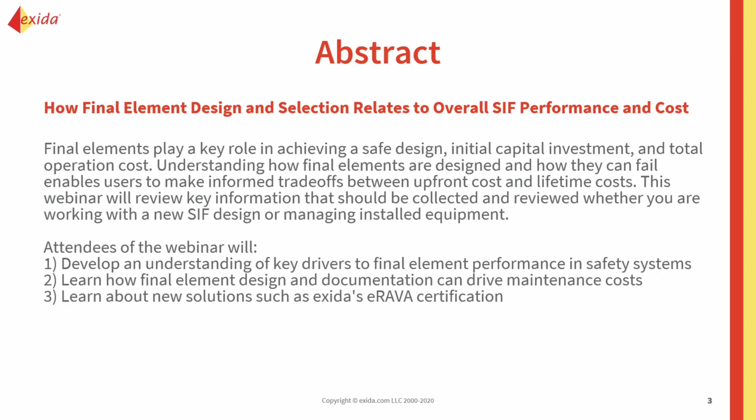We'll cover what the drivers are when selecting a final element, how that selection can affect maintenance costs, and learn about new solutions and ways to address that, such as exida's new eRAVA certification program.

exida is a customer-focused company. We really focus on three main areas: enterprise tools, certification and assessment, and lifecycle services. All of those are tightly related and reinforce each other, and we really try to bring a pragmatic approach to helping you solve your problems.

For many years, we've been playing defense when it comes to final elements and functional safety. A lot of our efforts, exida's efforts, and the industry's efforts have been on trying to avoid errors and mistakes being made that result in really unsafe systems being installed. And that's still very important, and there's still quite a bit of work to do in that area.

But we are making progress. The word's getting out. People are becoming more knowledgeable, and lots of companies, both equipment suppliers and plant owners, have made tremendous strides in that area.

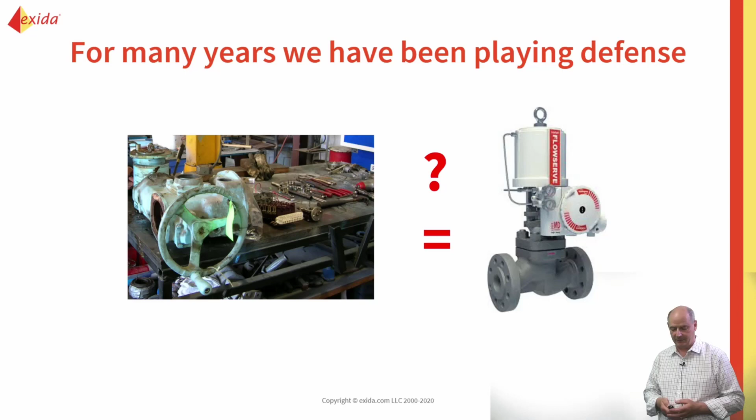The concept we'd like to introduce is the integrated process risk maturity model. So it's a classic maturity model based in 5 stages, going from really not a great deal of expertise over in the ostrich phase, moving all the way to a proactive or pretty sophisticated advanced solution.

And as you move from left to right, you're moving towards growing to the point where you're doing the right things, because all the way to the left, if you're not aware of the standards or kind of just viewing them as a tax, you might not even be doing activities you need to do. And as you move towards the center where you're becoming competent, maybe milestone 2 or milestone 3, where you're becoming capable and being able to do it in a repeatable manner, all the way to the right side where you're in kind of an advanced state and being proactive.

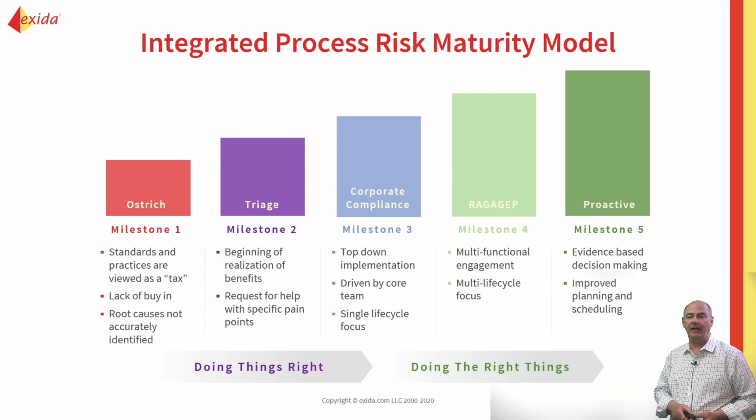You're collecting data, you're making evidence-based decisions. You've kind of moved from doing things right to doing the right things.

So that's just a general classic maturity model, and we've taken it and applied it to functional safety, alarm management, and cybersecurity. So if we really look at all 3 of those things, we can ask, how do all those things work together to increase plant safety?

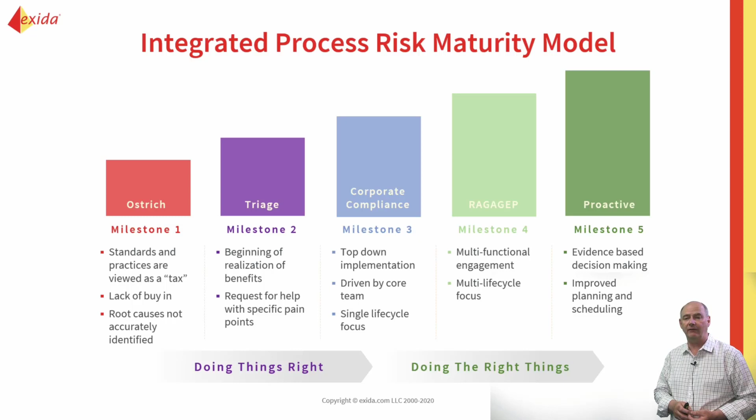I started with that photo. So a lot of work, as I said, has been done in that defensive stage, helping customers who weren't aware that there were problems or drivers, or have a problem and need somebody to help them triage it. So a lot of work's been done there.

We've done a lot of webinars on those types of subjects, and we want to start helping people move to becoming best practice and proactive in their approaches.

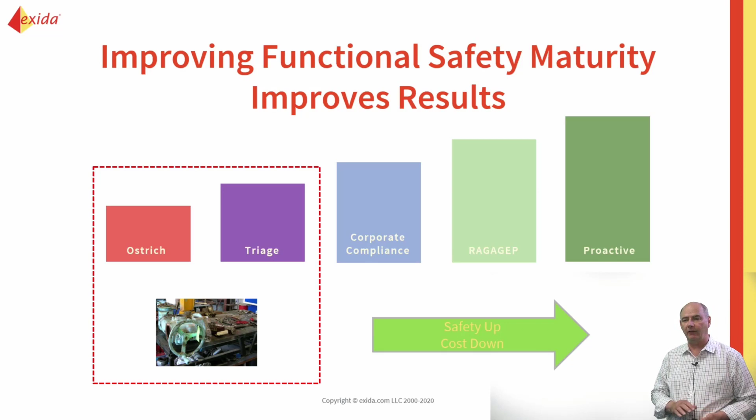So we want safety to go up and the cost of achieving it to go down. That's what we're going to focus a lot on today: what are the key levers that you can take advantage of to begin and continue your journey towards the right.

So failure avoidance is really what we could think of as classically systematic failures, things that can only be corrected by process or procedure. Some of those fall into design-related failures, and some fall into application-related failures. Design-related failures could be improper specification, either of the system or of the device being designed.

Application failures could be a failure that results from applying the wrong device or in the wrong application. So we're going to talk about methods to avoid and minimize those.

Failure reduction - there are ways to get better failure metrics from existing devices. Those are often the random failures or randomly occurring failures, and there are a few techniques that we've developed

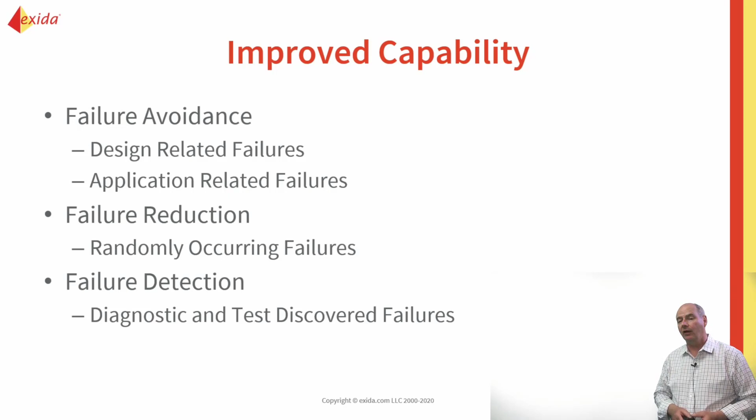that we're going to discuss about how you can get lower failure rates for devices in a justifiable and maintainable way. And then finally, failure detections - we know we're not going to get rid of all failures, so how are we going to detect them and correct them before they defeat the system?

If we look at currently what I would call a properly designed automation solution, I'd say that's right in the middle of the maturity model.

We give credit in the assessments and in our failure rates for well-designed, engineered industrial products that are properly applied. So if you're using, say, the standard failure rates that come with the device, you're using Exida, you're doing the normal stuff, you're getting results. Those results are indicative of what you would expect in your plant.

We've calibrated that with over 350 billion field hours worth of failure data. So we're really comfortable that that's kind of honed in and a good result.

We are not on the left-hand side, where we've got that really unpredictable or unrepeatable thing, but we really haven't gotten as far to the right as maybe we could. So today we want to talk about moving to the right.

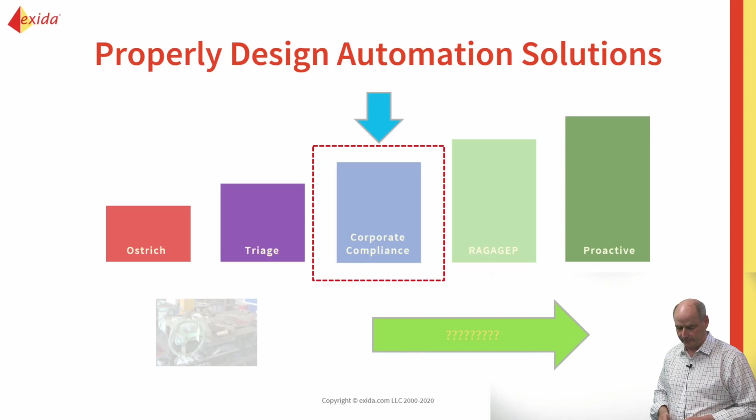Some key drivers that relate to maturity level, or how maturity level relates to them. If we're thinking about avoidance, it's going to be the failure rates of the product and the reliability of the product, but that really is going to relate to the selection of product. Over at maturity level 1, or ostrich, we might just be using generic failure rates.

If we move to the right, we're going to talk about new solutions that are in the eRAVA, or Exida remote actuated valve assembly, category. So we're going to move through a continuum where we're using generic to using certified components, to getting an integrated solution, to maybe getting a certified solution.

This concept of site safety index has a big impact on the failure rates you should select. And also there's an advanced analysis, a safety reliability analysis that can be done on products that may justify a further reduction. And then finally in the diagnostic and test realm, the testing that's being done really frankly could be

none. There are still people who have safety systems and don't have them on a periodic testing regime. And again, as we move from the left to the right, we could go from no testing, to typical testing, to following what's in the safety manual, and all the way to the right, we're going to be looking at optimized testing results.

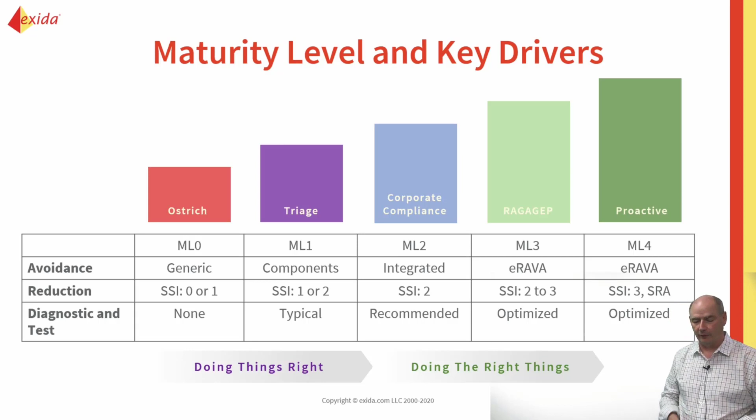So if we look at this maturity level 2, or right in the middle, for final elements, what does that look like? What should you be doing if you're taking failure rates out of an FMEDA report or out of Exida and using them? You should be using well-integrated and designed assemblies that have probably at this point a semi-formal

verification and validation technique. You should have typical plant capabilities when it comes to testing and maintenance, and you should make sure that your devices are implemented and tested per the requirements of their safety manuals.

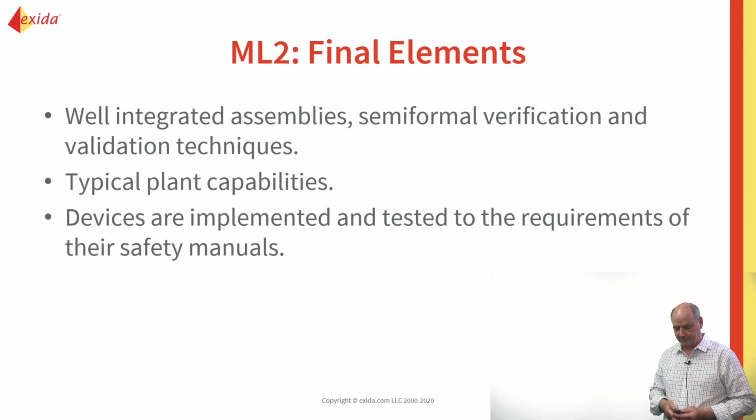So to move past what would be considered maturity level 2, what should you consider? You should consider using certified assemblies that have formal verification and validation techniques.

Look at process improvement in your plant that would move you from maybe a site safety index of 2 to maybe a site safety index of 3. And then make sure that the assembly you have has a safety manual for the assembly that's providing you kind of optimized testing information for that.

Proof testing information, that is.

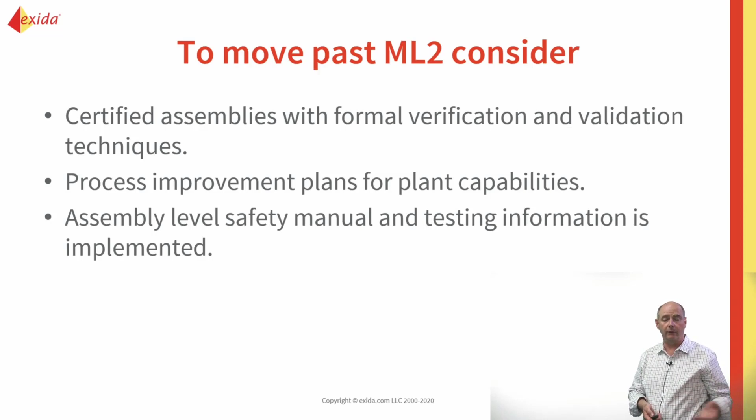So first thing I want to talk about is eRAVA. That stands for exida Remote Actuated Valve Assessment. That is a new program we've introduced in the last year, and it goes through a final assembly assessment, so the assessment of a complete final assembly. I'll talk a little bit about what we cover in that.

What that does is it basically reduces the variability and the risk associated with the assembly, and that provides you a more reliable solution. What's included in that is a comprehensive review and assessment of all the things in that.

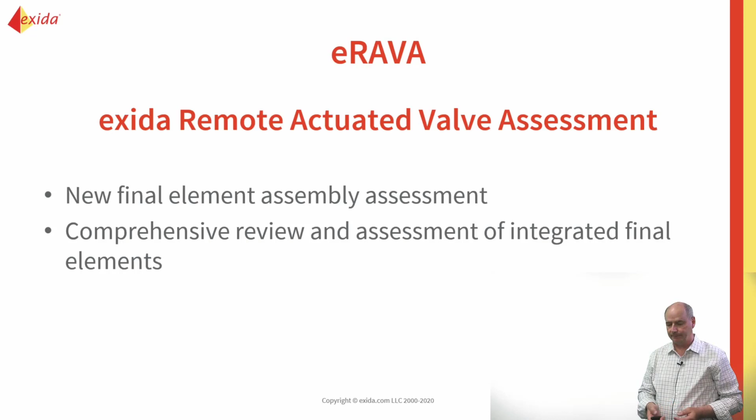So eRAVA has multiple things that we look at, and we look at multiple things in detail so we can provide a good assessment. So at the top level, we look at a deep dive of functional requirements of the assembly, application requirements of the assembly, detailed design specification.

Again, all of these are at the assembly level. Design verification, a fit for use evaluation, manufacturing capability, integration of the assembly, integration verification, then installation and operation and maintenance instructions.

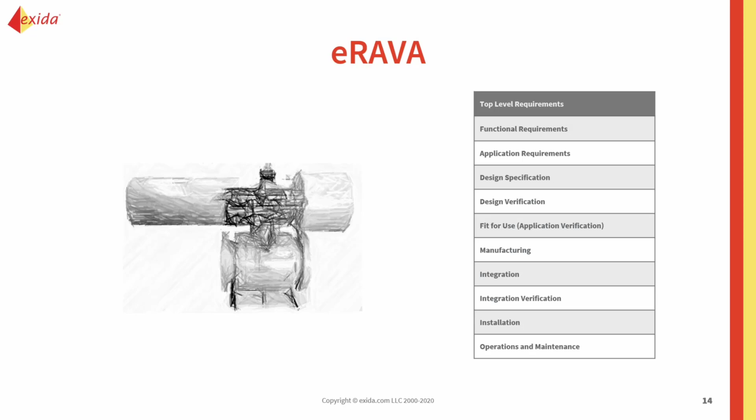If we expand that a little bit and just take a deep dive, let's take a deeper dive into design verification. So on the left-hand side, we've got our normal flow chart for an assessment project. And then with the eRAVA, we're going to go into that assembly.

And let's say we'll take, as I mentioned, design verification.

Under design verification, we're going to have multiple more detailed requirements we're going to look at, such as, is there a verification plan? Is the fail direction defined? Is it going to be a long standstill or only cycling once a year or so?

What are the fluid characteristics? What are the operating temperatures?

And then we could take torque, and this is just an example. All of these have greater detail, but for example, under design verification, we would have torque, and we would be looking at things like break to open torque. What's the break to open breakaway angle?

What's the run to open torque? End to open torque? Break to close torque? Run to close torque? And further. So for each of these subcategories, we're going to have a requirement that we're going to review and make sure is met.

And that the OEM has standards and practices to cover them, and then also publishes that information in a way such that the user can ensure that it's going to meet their requirements.

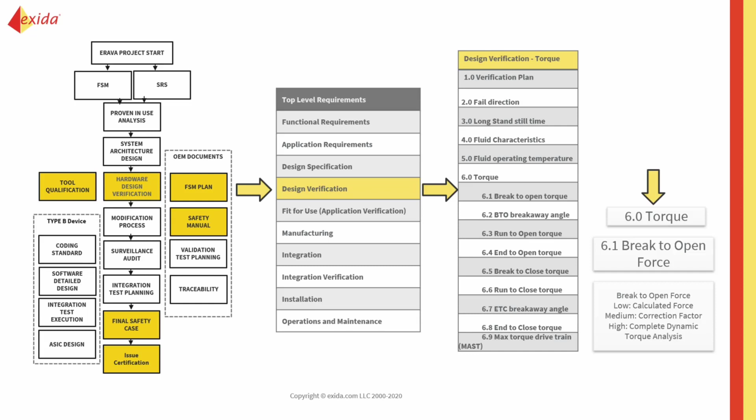In addition to the eRAVA, we also have a safety reliability analysis, and that's one where a detailed analysis of components can be done, which may justify lower failure rates as well if a specific component within a device is

designed to withstand the stresses or the application better, then it's going to have a lower failure rate.

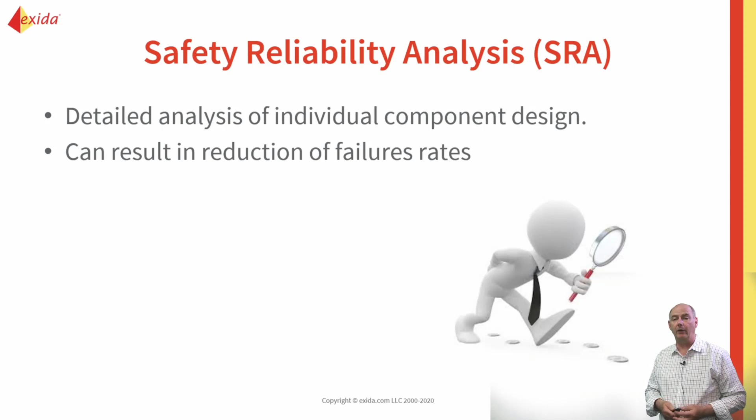If we look at safety culture or SSI, that's another big driver. We can realize that human factors play a big impact of safety performance. You have things such as imperfect repair, improper calibration, faulty installations.

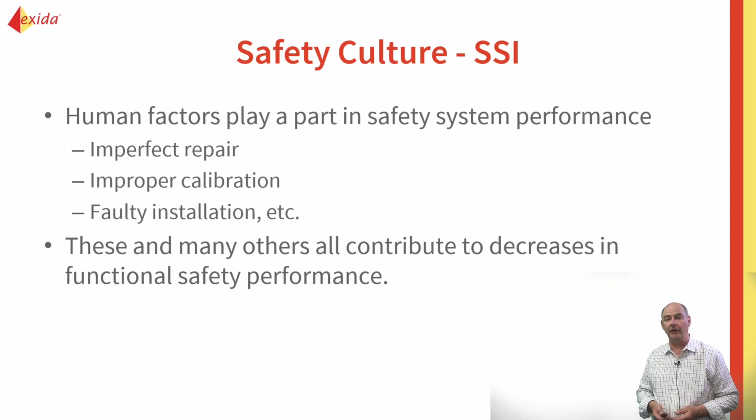These and other factors are going to decrease the overall safety performance, and Site Safety Index is a way to measure that. So Site Safety Index is something that exida has come up with, and we use it to adjust metrics.

So we could think of a typical plant as being Site Safety Index 2. If you improve, you might be Site Safety Index 3, and a perfect plant would be Site Safety Index 4.

But you could also be less than typical, and then you might be down at a Site Safety Index of 1 or 0. So it's a way to adjust typical failure metrics which assume typical performance.

To either give credit for or to provide some safety margin for less than ideal conditions. This allows sites with a strong process to take credit for that, and also allows sites that need to do some growth having accurate data

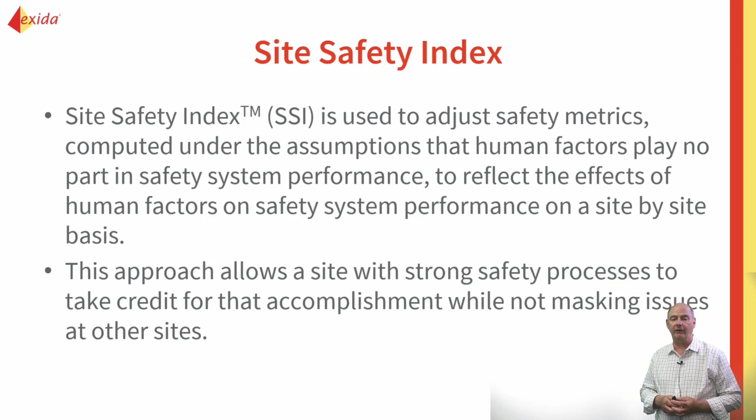There's procedures in place. If we move up to 3, it's almost perfect. They're correctly performed. They're done on time and on schedule.

And 4 might be an ideal, but it's unlikely that any plant really, or it's a challenge for a plant maybe to be perfect. So theoretically it's possible, but it might be a pretty hard lift.

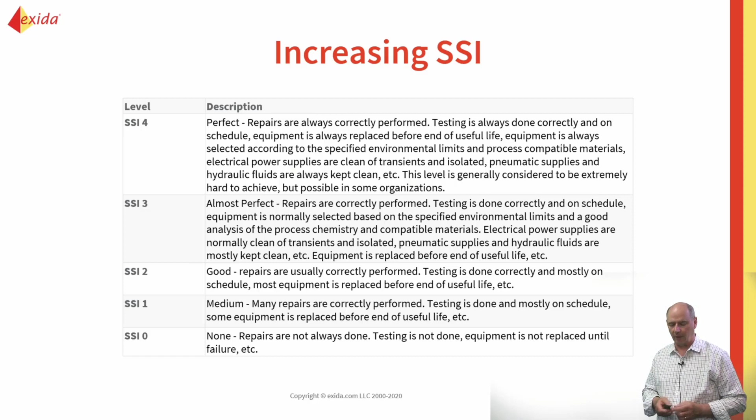Another thing that really can impact the safety and cost is improving diagnostics and testing. So when we think about testing, especially for final elements, a lot of our equipment, safety equipment, comes now with a lot of built-in diagnostics.

So if you're buying a safety transmitter or you're buying a safety PLC, there's going to be a lot of things that have been done on that system, but they're embedded in it and you kind of get it with the system.

For final elements, there's a lot that can be done, but a lot of times that's going to be more on the end user to ensure it's done correctly. So the first thing you need to know is, what are you looking for? If you don't know what you're looking for or how to find it, it's really like going on a scavenger hunt. You're not really sure which failures or failure modes contribute the most, or what effective testing is. So you need a strategy.

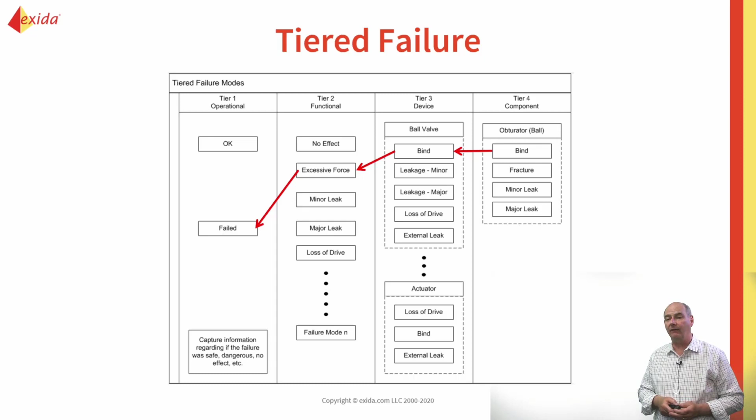This ties in very closely with the eRAVA approach and the FMEDA approach, because an FMEDA is going to go component by component in the device, building up those failure modes and faults all the way up to functional failure modes for the device. Knowing that and having that analysis, it's possible to map out the failures within the device to specific tests that could detect them. That test could be done automatically, like an automatic partial valve stroke test, or manually, like a partial valve stroke test or a leak test. Either way, it's important that they're done, but also important to map out those failures and properly allocate the failures to the failure mode.

For final elements, we've got five proof tests proposed, starting from the simplest, which is a partial valve stroke test. Number 2 is a full valve stroke test. Number 3 is a full valve stroke test in operating conditions. Number 4 is a full valve stroke test and a leak test offline, and number 5 is a full valve stroke test and a leak test at operating conditions.

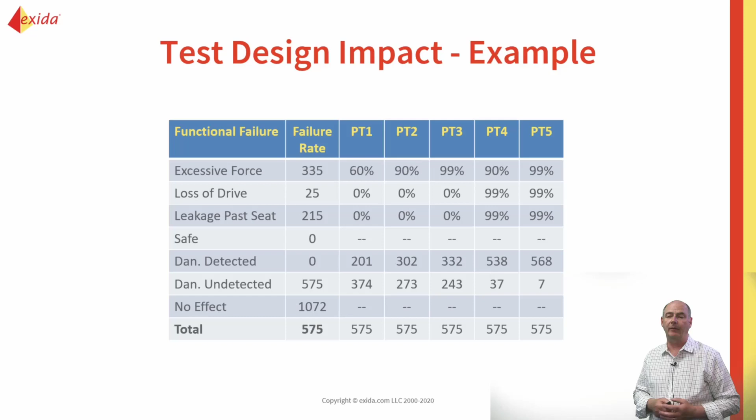You can see that for a valve body, your overall diagnostic coverage, or dangerous detected coverage, can change pretty dramatically. So having this information and designing your proof tests accordingly can really give you much better reliability, but also help you optimize and run those proof tests when they need to be done.

So if we start implementing these things, what kind of results can we expect? Well, one, if we eliminate those systematic failures or increase failure avoidance, we can significantly reduce design issues. I would categorize design issues as a misapplied product, an issue with a product, or an application issue resulting in putting a product in a situation or process it's not capable of handling.

Second, we can reasonably anticipate a reduction in failure rates. We've done several eRAVA assessments as well as safety reliability analyses, and getting a reduction of the failure rate in the range of 20 to 30% is reasonable. With designing the failure, proof testing, and diagnostics, we'll get good alignment of the effort used in the testing regimes to the results.

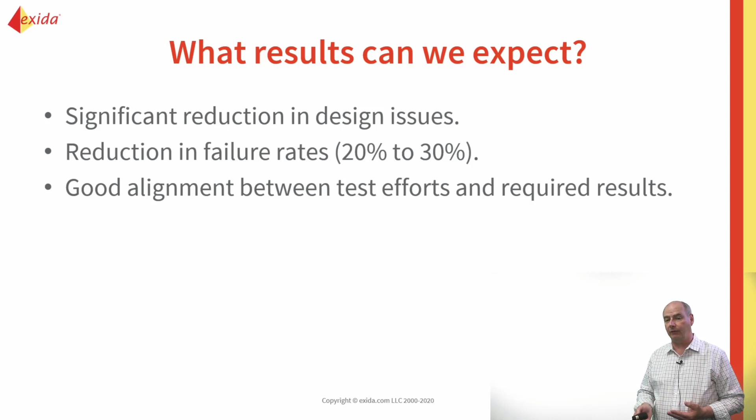So how do we get started, or how can someone get started? If you're an end user, you can begin looking for OEMs that are supplying certified integrated assemblies. If you're an OEM, you can investigate getting your entire assembly assessed. If you're an integrator, you could look at the same thing, or ask the supplier. Either way, this works for supplier or plant owner.

Share more application information between both parties. You can evaluate your site safety index—we've got a survey you can take online. If you go to our website, we'll give you an idea of where you probably fall. You can begin performing functional safety assessments, FSA 4s.

Document how your systems are performing over time, collect the data in the plant and evaluate it by application, review proof test results and strategies, as well as all the other steps that are very important in an FSA 4. With that data, you can begin to optimize a proof test design, and exida is always available to help with functional safety assessments, as well as doing benchmark studies of where you are now and give recommendations for how to improve it.

You can see that if we begin to pick the right gear, start getting lower failure rates because we're picking well-engineered gear for our application, and optimize our test investments, we really can begin to increase our safety and reduce our cost.